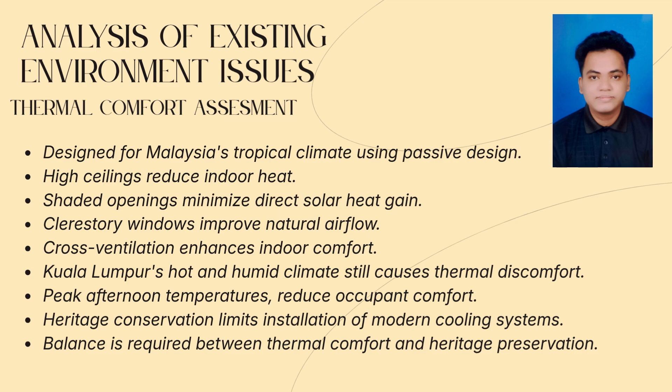Next, natural and mechanical ventilation. Large openings were used to promote natural ventilation. Cross-ventilated corridors improve circulation, and interconnected spaces allow continuous airflow.

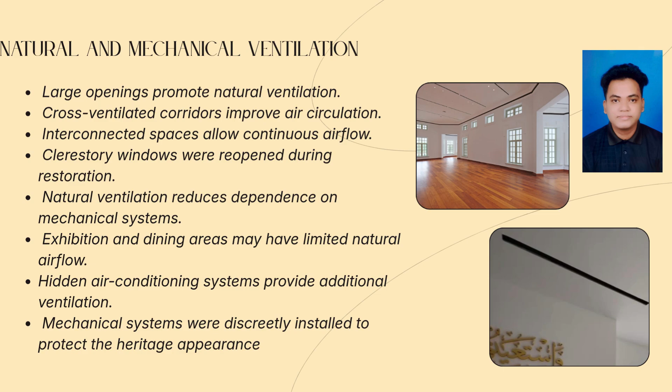The clerestory windows were reopened during the restoration of Carcosa Seri Negara. Natural ventilation reduces dependence on mechanical systems, but exhibition and dining areas may have limited natural airflow. Hidden air conditioning systems were provided for additional ventilation, and mechanical systems were discreetly installed to protect the heritage appearance. Next, daylighting and artificial lighting.

Natural light reduces dependence on artificial lighting during the daytime, but excessive daylight penetration may cause glare and increase indoor heat gain, especially near windows facing direct sunlight. Artificial lighting systems were introduced during the restoration, and modern lighting installation was to improve visibility for visitors while being carefully integrated to preserve the building's historic appearance.

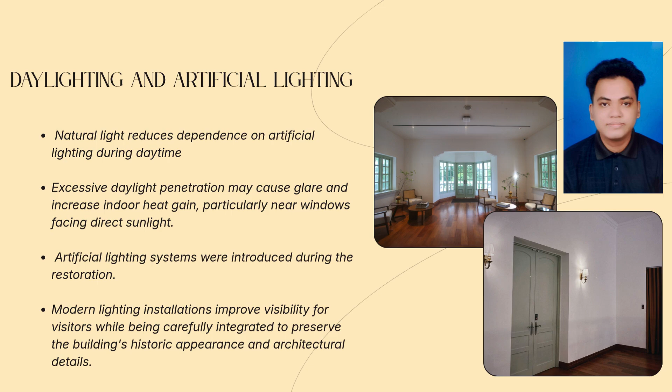Next, acoustic performance. The thick masonry walls, timber floors, and high ceilings help absorb and distribute sound naturally. The large open spaces—galleries, restaurants, and event areas—can create sound reflections and reverberation. External noise from nearby roads and urban activities also affects certain areas of the building.

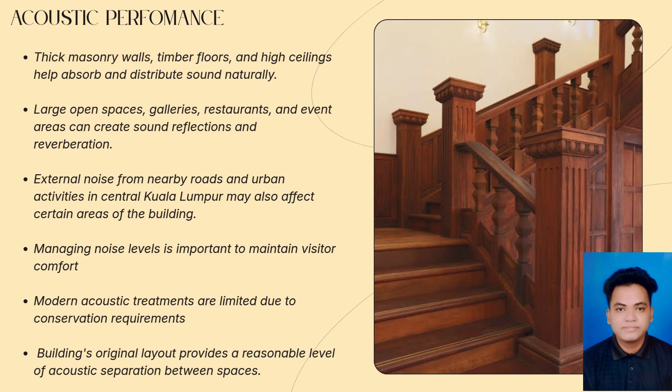It is important to manage noise levels to maintain visitor comfort. Acoustic treatments are limited due to conservation requirements. The original building layout provides a reasonable level of acoustic separation between spaces.

Lastly, indoor air quality. It's supported by the building's natural ventilation strategy and the use of breathable traditional materials, which allow moisture movement through the walls and reduce the risk of trapped humidity, mold growth, and material deterioration. But the tropical climate still presents challenges related to high humidity levels, which may affect occupants' comfort.

The discrete mechanical ventilation system assists in maintaining indoor air quality for visitors, staff, and exhibition space.

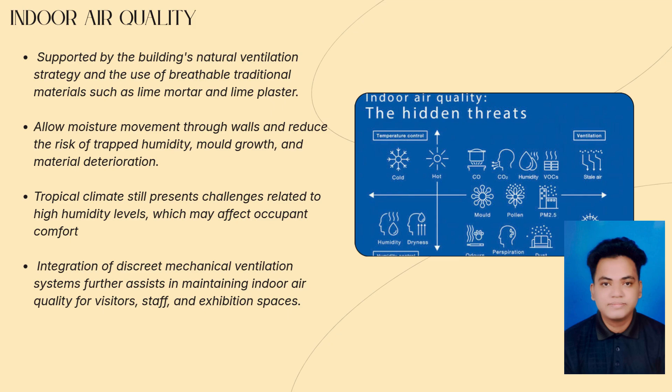Next, I will pass it to ID. Thank you, Haris. Next, I will explain the existing building service in Carcosa, Seri Negara.

First is the electrical supply system. The original electrical system was not fully retained because it no longer met the safety standard. So the electrical system was upgraded while preserving the heritage value of the building. The new wiring was installed using concealed and reversible methods so that the original wall and structure were not damaged.

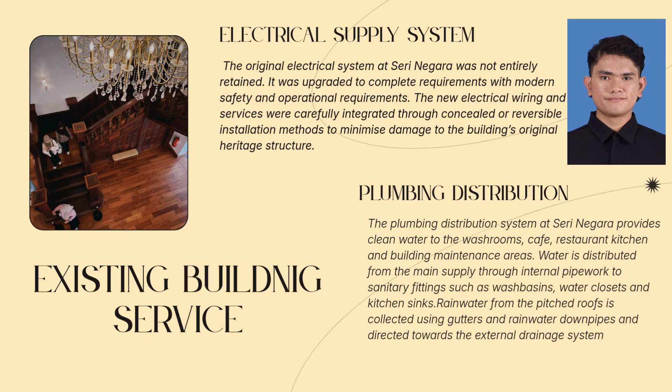Next is the plumbing distribution system. This system supplies clean water to the washroom, cafe, restaurant, kitchen, and maintenance area. Water flows through internal pipeline to sanitary fittings such as wash basin, toilet, and sink. Rainwater from the roof is collected through gutter and downpipe before being discharged into the external drainage system.

Now I will explain the wastewater and sewerage management system. This system collects wastewater and greywater produced from washroom, wash basin, the cafe, restaurant, kitchen, and cleaning activities. The wastewater is carried through sanitary stack and underground drainage pipe to the main sewerage discharge point. For the restaurant kitchen, grease and food waste must be properly controlled before entering the drainage system. This helps prevent pipe blockage, unpleasant odor, and drainage overflow. Overall, this wastewater system ensures proper hygiene while protecting the surrounding environment.

The next building service is telecommunication and data service. Modern telecommunication facility has been added to support the building operation as a heritage gallery and visitor destination. The data cable were carefully installed within existing service space so that the original heritage structure was not affected.

Lastly, the heating, ventilation, and air conditioning system, or HVAC. Since Malaysia has a tropical climate, the building does not require a dedicated heating system. Instead, it combines natural ventilation with modern air conditioning. The building wrapped around veranda, large window, French door, and shaded opening allow natural cross ventilation. These features reduce heat gain and improve indoor comfort while maintaining the building's original architectural character.

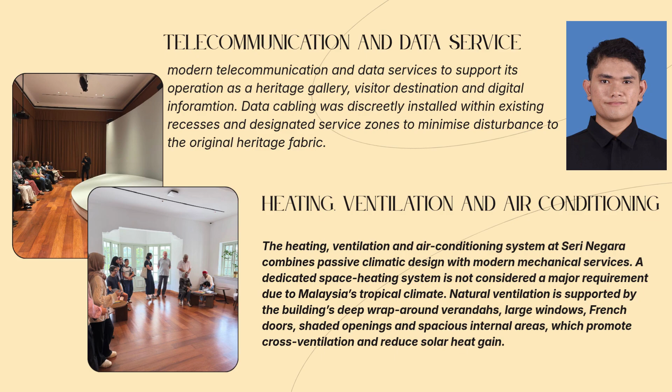I will explain about the adaptive use evaluation of Seri Negara. Instead of letting this old colonial mansion go to waste, Khazanah Nasional restored it under the Warisan KL initiative and turned it into Galeri Seri Negara, a cool public heritage gallery, along with Semuka Cafe and Serai House Restaurant on the ground floor. They didn't turn it into a boring office, but they kept the original layout intact to show Malaysian independence history.

Next, I will explain lighting and acoustic. With intense daylight coming through the large colonial windows, they place invisible UV filtering films on the original window glass so the old documents won't fade. For the gallery light, they use low energy LED mounts on standalone frames, meaning they didn't have to drill a single screw into the historic plaster ceilings. They also fixed acoustic issues because the old upstairs timber floorboards echo footsteps. They solved this simply by laying down acoustic carpet along high traffic walkway and keeping the noisy cafe downstairs physically zoned away from the quiet gallery upstairs.

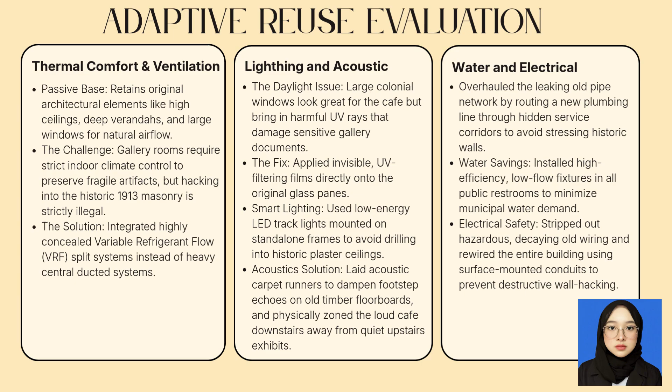To keep it looking neat, they hide the wire inside custom protective casing painted dark green and white to blend right into the original wall. Everything is hooked up to a smart building management system (BMS) that automatically shuts off the lights and aircon after closing hours to save energy.

Good day, everyone. My name is Akmal. Now I want to discuss the purposes of sustainable intervention. The first is passive design and natural ventilation enhancement.

Low velocity attic and ceiling fans, with slow ceiling fans to match the old style of Carcosa Seri Negara. Also, put solar powered fans in the roof to remove air from the attic space before it gets into the main room of Carcosa Seri Negara.

Next, energy efficient smart LED lighting and sensors. Carcosa Seri Negara will benefit from this intervention. Historic luminaire retrofitting replaces all the lights with new energy efficient LED lights inside all the fixtures of Carcosa Seri Negara.

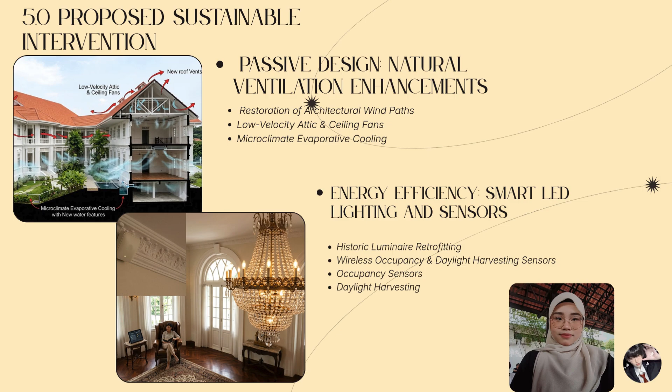This ensures the building will use less energy for lighting. Wireless occupancy and daylight harvesting sensors use sensors that do not need to be wired into the walls of Carcosa Seri Negara. Occupancy sensors automatically turn off lights in areas of Carcosa Seri Negara that are not being used. Daylight harvesting automatically turns down the lights when there is natural light coming into Carcosa Seri Negara through its bay windows.

Next, water conservation, rainwater harvesting system. Carcosa Seri Negara has a site with a lot of roof space so it can collect and use a lot of rainwater. This will help Carcosa Seri Negara to conserve water.

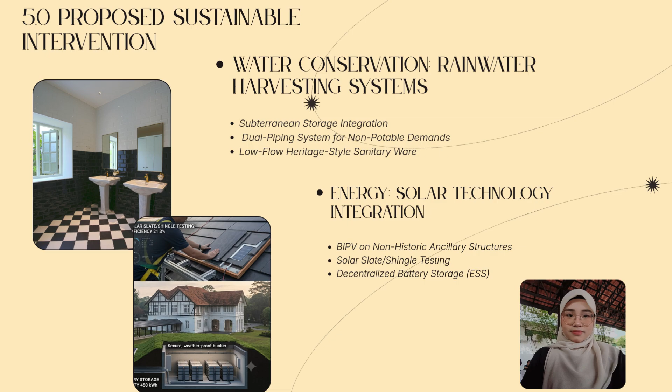If solar panels need to be placed on the roof of Carcosa Seri Negara, special solar tiles are used that look like the old roof tiles. This decentralized battery storage (ESS) stores the energy collected from the panels in a special system that can be used at night to power the lights and other things in Carcosa Seri Negara.

To conclude our study, Seri Negara is much more than just a beautiful old mansion. It is an irreplaceable landmark where the Malayan Constitution was signed. Our research shows that its adaptive reuse, transforming it from a historic guest house into a boutique space, is highly effective.

It keeps the building's social memory alive while funding its regular maintenance. From a sustainability standpoint, choosing to restore rather than demolish its massive foundation significantly cuts down on landfill waste and drastically reduces embodied carbon emissions. Ultimately, Seri Negara proves that historic Malayan architecture can actively contribute to a lower carbon, culturally rich future. That concludes our presentation. Thank you.